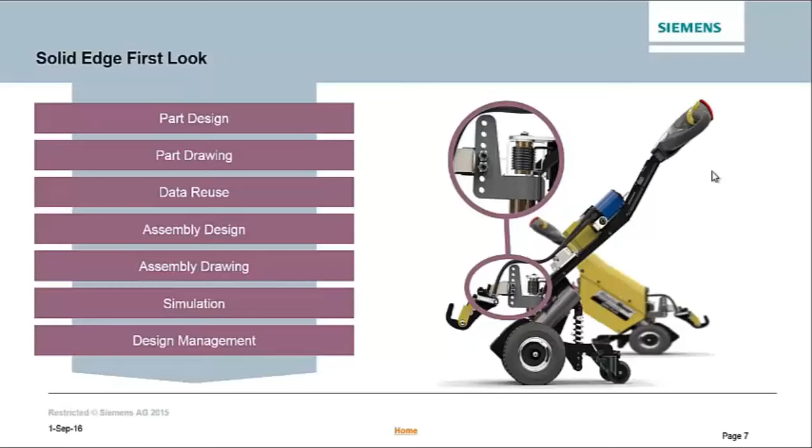We'll also talk a little bit about the built-in simulation tool, where we may need to check for strength and see if a part is going to work properly as intended, and then wrap it up by showing you the built-in design management application within Solid Edge.

Before we get into the part design portion of the presentation, I wanted to give a real quick history lesson on CAD and where Solid Edge is moving in terms of the applications built into Solid Edge and different modeling techniques.

On the left-hand side, you'll see what we call history-based modeling. This is modeling that was essentially created and started in the mid-1980s. It was enhanced and developed and put on a Windows platform in the mid-90s. Many of your CAD systems out there today are utilizing this approach to modeling parts in 3D, Solid Edge included.

Solid Edge has history-based modeling tools. Most 3D CAD users out there today are utilizing this approach. Essentially, when you create models, you're creating 2D sketches, which then create features. Those features are built on top of each other, and when you're finished, all those features make up the entire part.

There's a lot of good things about history-based modeling. It's dimension-driven or parametric, so you can drive the model very easily. It's also feature-based. There are some downsides, though, which we'll talk about in more depth later. A lot of times, utilizing a history-based modeling approach, you have to pre-plan your design and how you're going to model it within the CAD system before you actually get started.

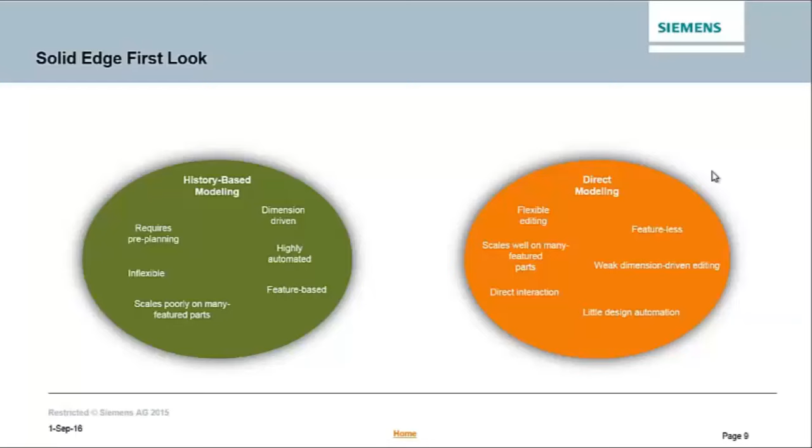It's very flexible. Some of the downsides to a direct modeling approach, though, are that they're really not comprised of a feature-based model, and there's little automation that can be done within these types of modeling procedures. Also, while there is some dimensioning and parametrics involved, they're very, very weak.

A few years ago, Solid Edge decided we wanted to combine the best of both worlds of history-based modeling and direct modeling. So we took the best of both, added some innovative techniques in the middle, and it comprised the tool set found inside Solid Edge called synchronous technology.

So with Solid Edge, you have a lot of flexibility on how you can model parts. You can use both the history-based modeling approach as well as synchronous technology to create these parts very, very easily.

So what we're going to do today is show you, within the demonstration, how we're taking the best of history-based modeling and the best of the direct modeling approach. We'll also incorporate some of the innovative tools Solid Edge developed to create synchronous technology and show you live in the demonstration how this particular CAD paradigm works.

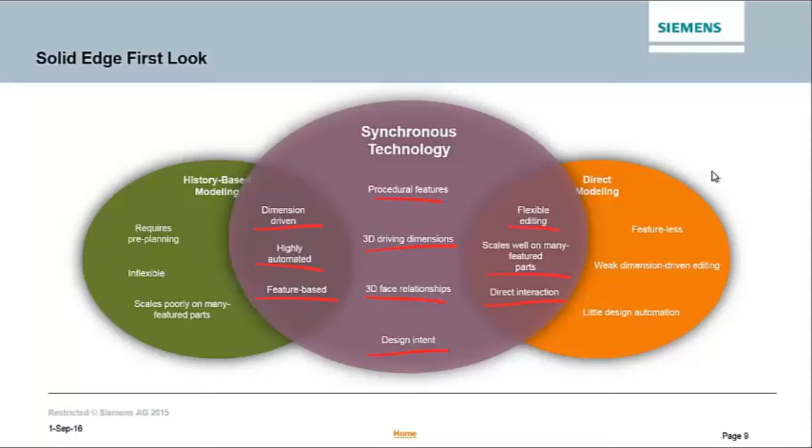I'm going to pull up Solid Edge, and again we can see the master mover tool that we're going to start creating some components with. And you'll see here we've got the entire machine.

We're going to go through a day-in-the-life scenario of an engineer or designer who's been tasked to either make changes to this or maybe create some new components. What I've been tasked to do is construct a brand new part from scratch that's going to connect our clamping mechanism up here in the front to the main body.

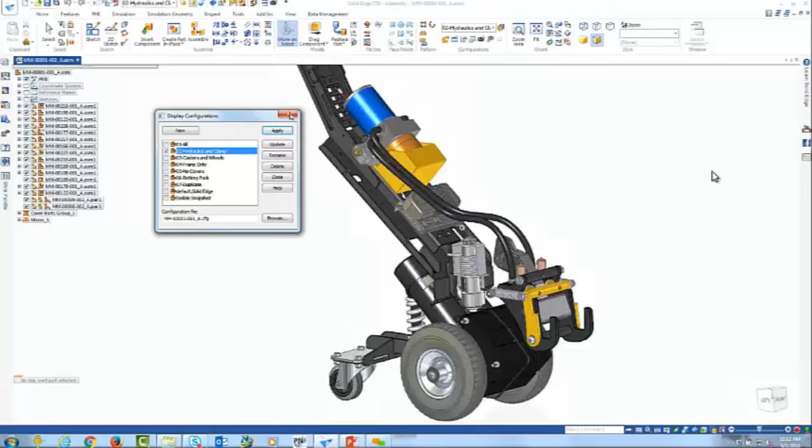What I may want to do initially is turn off some of the outer components, maybe just look at some of those internal components. Solid Edge makes it very easy to show and hide components at will. This is what we call display configuration, and it allows us to create that very easily for what we want to look at.

As I zoom into these components, to give you a little better feel for where we're going, I need to connect the clamp mechanism that's kind of just floating out there in space right now, connected with the hydraulic line to the main body. So in Solid Edge, I'm going to show you this approach.

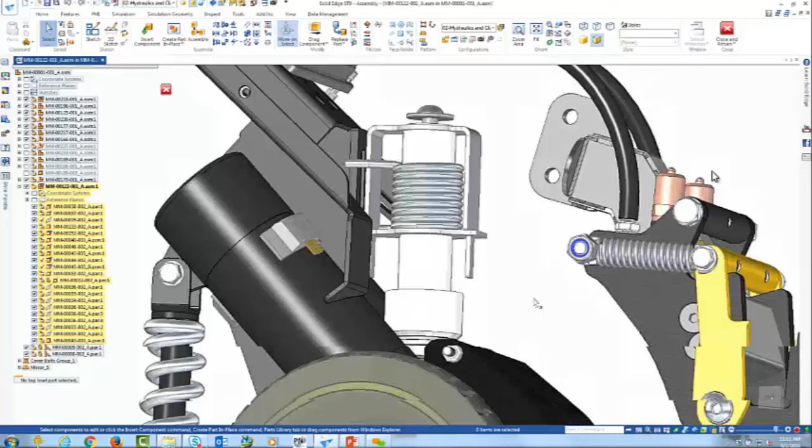In Solid Edge, you have the ability to use what we call a bottom-up design approach or a top-down design approach. Bottom-up meaning I go into a blank design area, model a part by itself, and then bring it into the assembly later. The top-down approach is more flexible since I can model my new part relative to my existing components, so I can check for fit and function as I'm doing the design and make sure I'm not going to detect any interferences, or as I'm completing the design, it's going to fit properly right out of the design process.

What I can also do is reference the geometry of all these existing parts. So what I'm going to do is create a brand new component, and you'll notice I can snap to any location here for where I want the part to begin. You'll also notice I can specify which direction is X, Y, and Z very easily.

Many companies today utilize a smart numbering approach to creating document numbers, and Solid Edge does the same thing. We have a nice smart numbering generator system. So instead of looking up in an Excel document what the next available document number might be for my company, I can automate that process and have it generate the next item for me within the CAD tool, and from there automatically create that within the creation of the new document.

We'll call this, for example, the clamp arm, and give it a nice description. Again, I can specify where I want to save my documents here. We'll talk a little more about the built-in data management tools later, but we'll save it here within our working location.

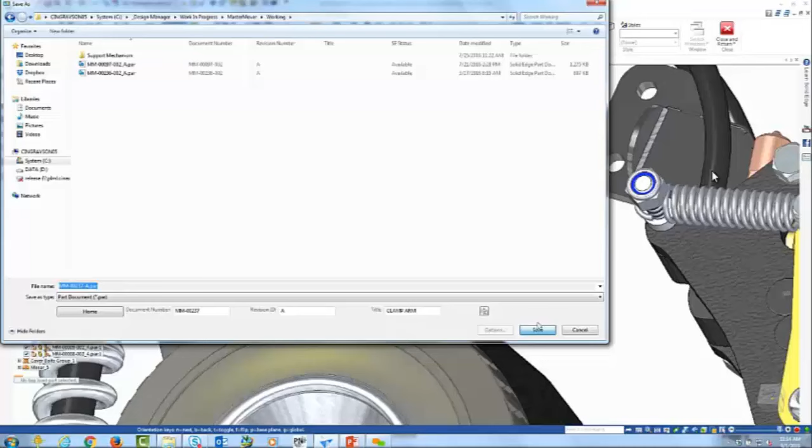The other thing I want to draw your attention to as we're modeling this part is pay attention to how much actual 2D drawing I actually do. You'll see how minimal it is in creating this part.

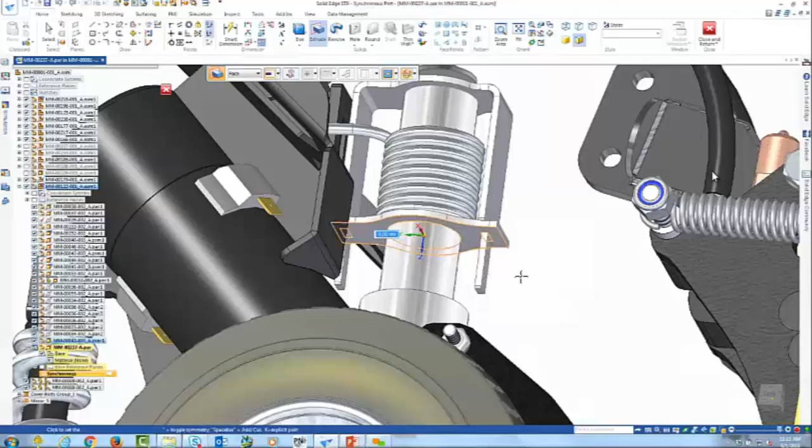The first thing I want to do is borrow some geometry off of some existing components. I know my part's going to reside somewhere in this area, so I can grab the face of an existing part and very quickly stretch it down and mount it to the part that's underneath it. As I turn off my background components, you'll see exactly what it just created for me—very, very quickly, without having to draw any type of 2D geometry, I've created this as the basis of my part.

Now right here in the middle, I've got two little rectangular cutouts. I actually don't want those to be cutouts—I want to create a slot instead. Very quickly, I can just drag my mouse through that zone and eliminate that material, so it creates more of a clamping component versus the little cutouts.

I also have a lot of direct interaction with the part as well. For example, if I want to lengthen this area out a little bit, I can do that just by typing in a value—very quickly stretching the component out again without having to create any 2D geometry.

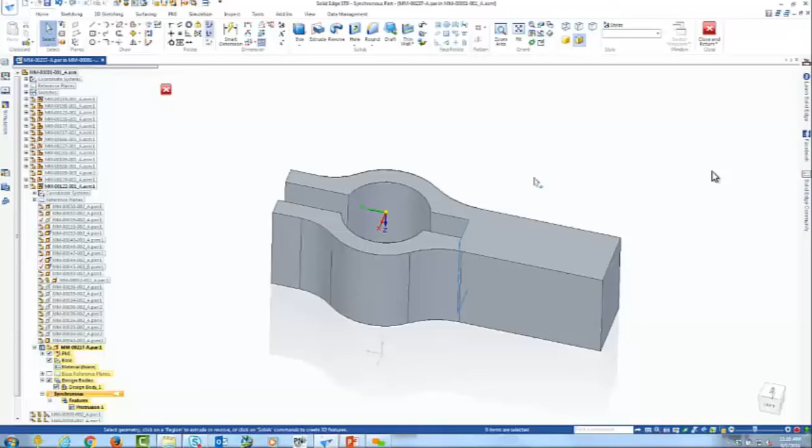As I turn on the background components again, as I mentioned, we need to mount it to our clamping mechanism out here in the front. So I may want to create some additional material, and again I can reference what I have so far and very quickly either cut away or extend material up, or in the area where it's going to clamp into the clamping mechanism.

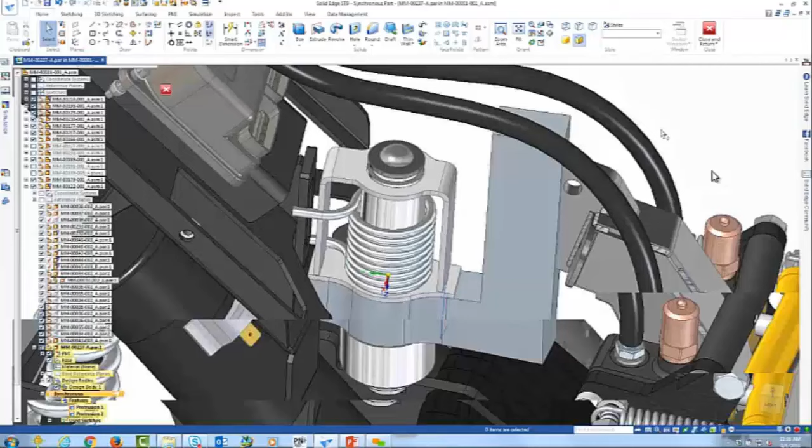Now, as you look at what I have so far, obviously I'm not completely finished with my design. I might need to create a slot or cutout here in the middle of my clamping arm, and some mounting holes so this component can mount to that. I'll go ahead and do that in a few minutes. In the meantime, I just want to focus on some other details of my design.

For example, let's get rid of some of those sharp edges. We can go through and tag these sharp edges quickly and eliminate those, putting some rounds on. Notice I can also pick through the part model to get to edges that are maybe on the back side. We'll round those first, then maybe round the outer edges with a smaller radius, and get this part looking a little more aesthetic.

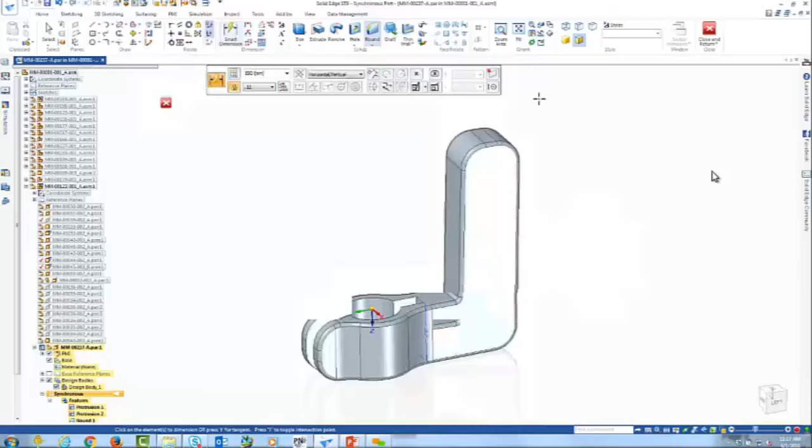The other thing too is I don't have to create, as I mentioned, a bunch of 2D sketches to create features. I can very quickly make my model parametric. Notice that I can directly dimension the model itself.

What's nice about our dimensioning tools is how flexible they are. Notice with placing a dimension on this part, I can choose to extend material out to the right to add material that way, or maybe split the difference and have it grow in both directions, or just have it go toward the inside. So I'm very flexible with how the part is modified. I have control over that as the user.

We'll make that 45 millimeters exactly. So it's not just about pushing and pulling and randomly picking what that's going to be. I can very easily place precise dimensions on the model. We'll add a few more so I can get my part exactly what I want it to be.

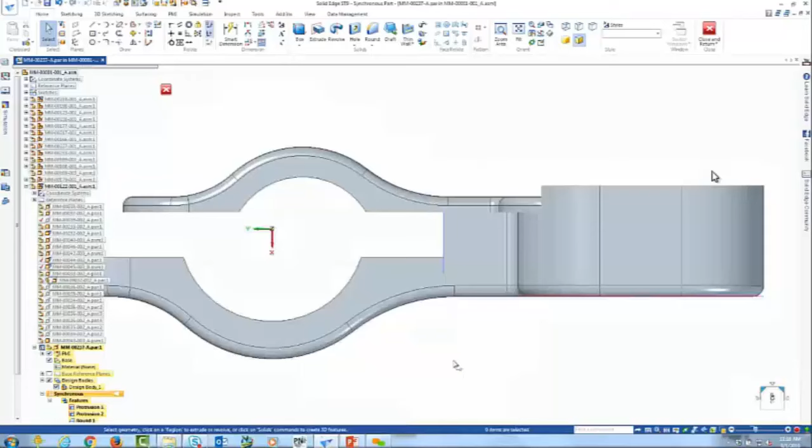So we'll add a few more dimensions. Maybe place a dimension here that extends out, and we'll make that, let's say, 40 millimeters exactly. You'll see the part automatically updates there. Maybe we want to change the length of this slot to some other value. Right now it's at 31.3. Let's make that 34 even.

Let's dimension the bore here. We'll call this out as a diameter versus a radius, and change that value. Actually, while I'm at it, let's put a tolerance on that. We can easily go from nominal dimensions and instead put a tolerance value on, maybe plus or minus some values.

Then maybe we'll add one more dimension over here for that slot cutout we created earlier, and make that some value, let's say 9 millimeters. So you can see how easy it is to throw dimensions right on the model and make adjustments as necessary.

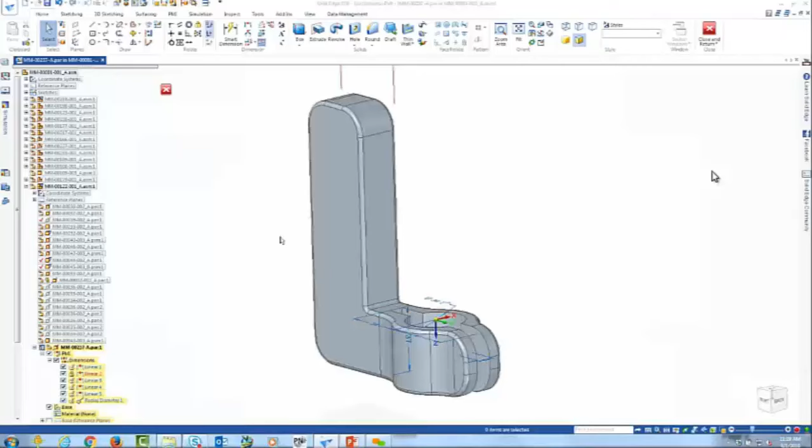Maybe the last dimension I'll place is an overall height. Let's see how tall this is. Yeah, that's 150, which is what we're looking for.

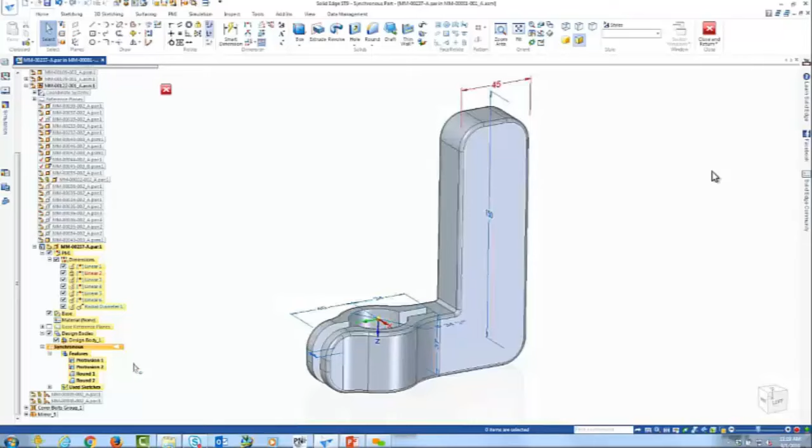Being able to parametrically create and modify the part at will, without having to create 2D sketches, is what separates synchronous technology from the history-based modeling approach, where typically you're spending more time drawing than working on your actual design. I'm going to turn off these dimensions for a second.

Again, let's turn on those background components and take a look at what we have so far. I'm almost done with the design—I just need to quickly put that slotted cutout and those mounting holes in my part.

Let's get some information from other components. Let's see how wide this is—it tells me it's just shy of 8 millimeters in width. So when I create a slot, I know exactly what the width needs to be. We have a specific slot feature we can create. Let's just specify where we want that to be.

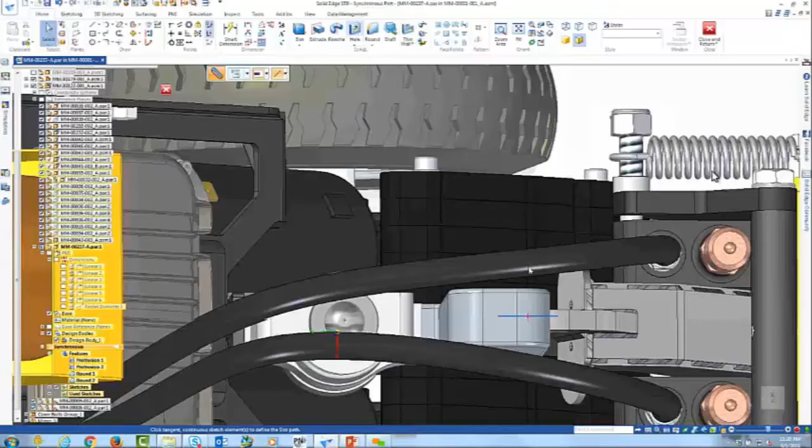Again, this is only the second piece of 2D geometry I've created, and it's just a simple line. From there, I can go through my slot feature and blast a slot right through the part. And from that simple line, it creates a nice slot for me.

We mentioned earlier too about the benefits of CAD being feature-based, and you can see over here on the left-hand side all the different features that comprise my component. So I have protrusions and rounds, and that slot feature I just created.

Just like you might be used to if utilizing a history-based application, you can come in at any point and modify those features. Maybe instead of a flat edge to my slot, I want a nice rounded edge instead. I can go into that feature and make modifications very easily. Or if I wanted to change the width, feature-based modeling allows you to make those changes easily. We'll make that back to a flat end.

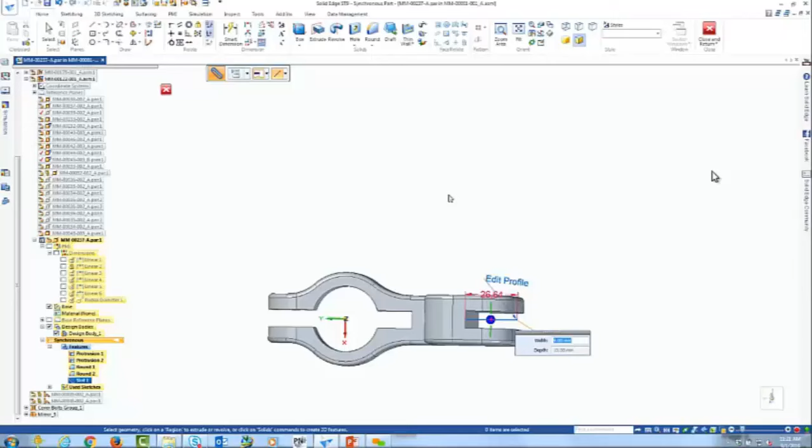Let's turn on my background components and make sure my part's fitting in there nice and neat—and it is, we've got enough clearance. Really, the last thing I need to do is place some mounting holes in there, and we can do that very easily as well.

Our hole feature allows us to create any type of hole, whether it's a simple through hole, counterbore hole, or countersink. You can go through and change any of this to what you want it to be for any types of standards that your company might use.

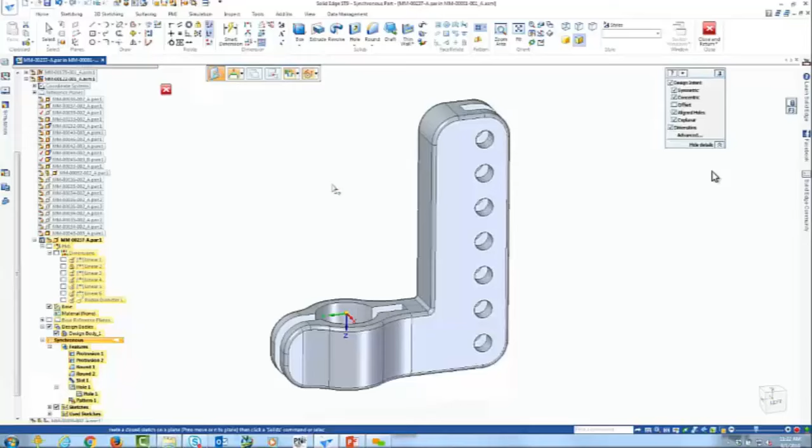In this case, I'll place a hole here at the end of that radius, and for flexibility in mounting this, we'll place several of these. Maybe we'll make a 7x1 pattern and equally space these by 20 millimeters, so that as we mount the clamping mechanism, they can choose which mounting holes they want to use.

Now, what is this part made out of? Sometimes you may want other information, like how much does this part weigh. We have a built-in material table, and you can customize the materials your company utilizes. In this case, I'll make this out of aluminum cast—it has all the different material characteristics here, and I can just apply that to the model very easily.

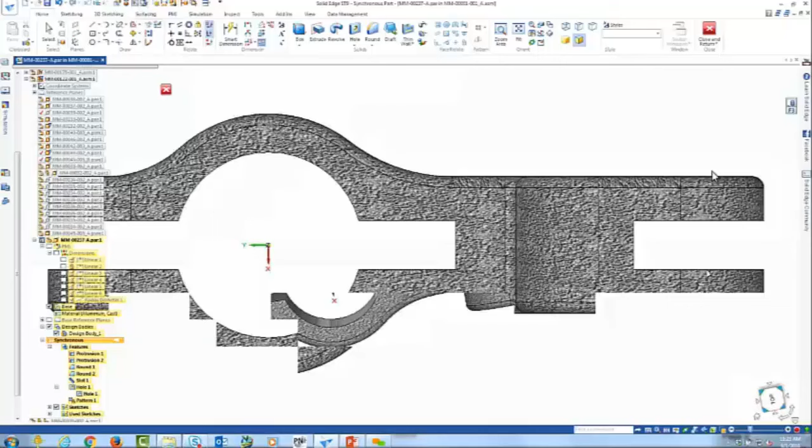The other thing is I want to make this look a little more realistic. I may want to show where these machining operations happen, so I may want to change the look of some of these faces. We'll change the colors of the slots, and maybe do the same thing with the holes, to make this look a little more realistic.

We'll go ahead and save what we've done so far.

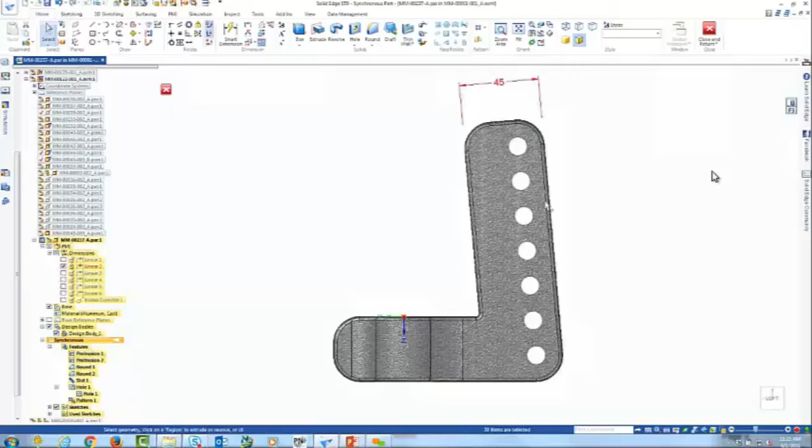Just one more drastic change—maybe as I'm thinking about my design, I realize that to add a little more tension as it's mounted to the clamping arm, I may want to take this entire vertical leg of my clamping arm and put a little bit of angle to it. So I can take that entire leg and rotate it 5 degrees, so that when the clamping mechanism is attached, it adds a bit more tension to make the traction a little better for moving those heavy loads.

So if we go back to the PowerPoint presentation, we saw that we were able to use the best of both worlds—history-based modeling as well as the direct modeling approach. Essentially, we use synchronous technology to very rapidly create a model with very minimal 2D drawing capabilities. I was able to create that entire part by only drawing 2 single lines.

The other thing we haven't talked too much about is the engine, or kernel, which runs Solid Edge—it's based off of a Parasolid kernel, which Siemens owns, so it's the best in the industry. Many of our competitors utilize the Parasolid kernel on top of their CAD applications as well.

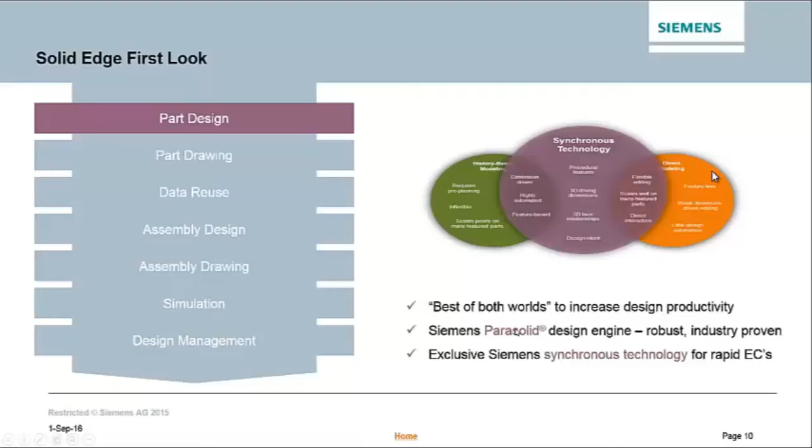So the next thing we want to do is create a drawing of our model. We want to communicate that to the manufacturing floor—how is this part going to be created, how do we essentially make this part. So we want to document that within a 2D drawing.

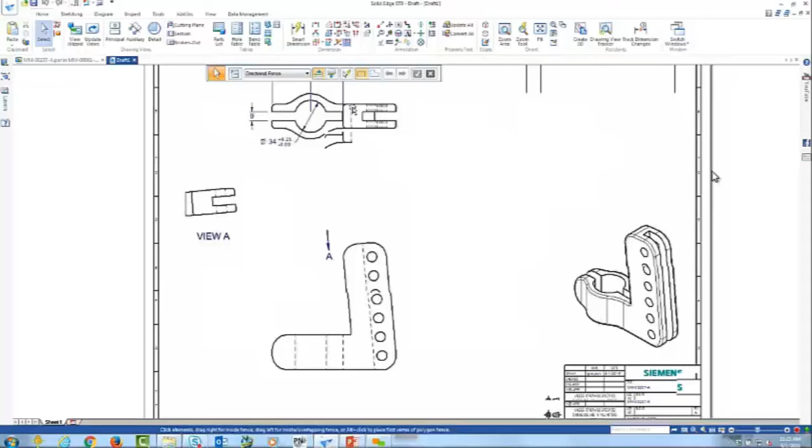Right here from the model, I can very quickly tell Solid Edge to create a drawing of my model. Just come up here and say, let's create a drawing. What it's going to do is place this drawing onto a template—this is what we call a quick sheet template, which allows us to extract views and specific information from different views. In this top view, I told it to extract any of the dimensions that I placed, and if I want to add or replace any new dimensions, I have the same ability to do that here.

Utilizing the same dimensioning tools that we utilize in the 3D modeling environment, we utilize the exact same tools here in the 2D drawing. So users don't have to learn two different applications. They can utilize the same tools both in 3D as they do in 2D. I'm just going to place a few dimensions on this view to show how that's done.

We can also do the same thing in documenting the hole locations. Again, it's very easy to do that.

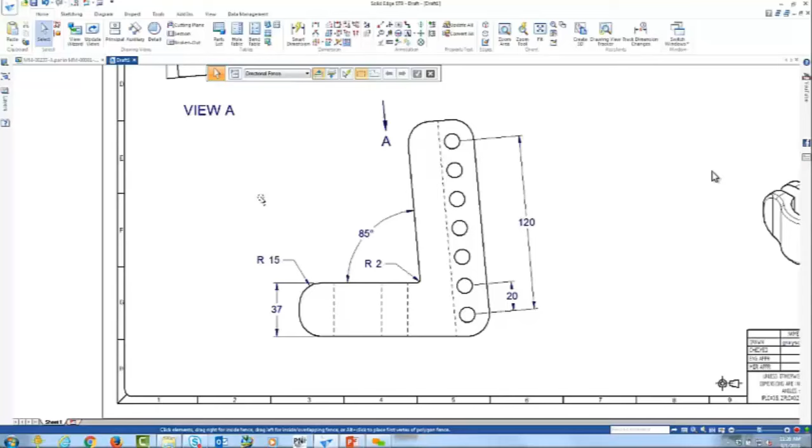Other types of details that you might need to add to the drawing, say for example, placing center lines and center marks, it's very easy to do that. Simply click on the geometry. Or if I want to do multiple center marks at the same time, I can window select and create all those simultaneously. Same thing with center line - just place the elements there by clicking on the hidden line. We'll do that for the hole locations up here as well.

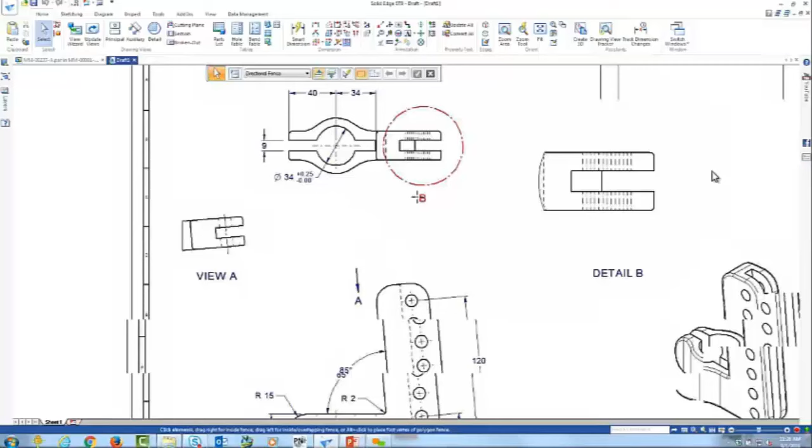Creating other views is also very easy. If I wanted to create a detail view, I simply just create a circle. It'll automatically blow that up and create detail B. And then what's nice about that is as I move that detail circle around, it'll automatically update this so I can get this exactly where I want it and document exactly how much detail I want.

The other thing about detail views which is nice is in this case, it's a 2-to-1 scale, but even when I place dimensions on this, it's going to place the dimensions per their true value. So it doesn't scale the dimensions up - it's always documenting what this is from the model itself.

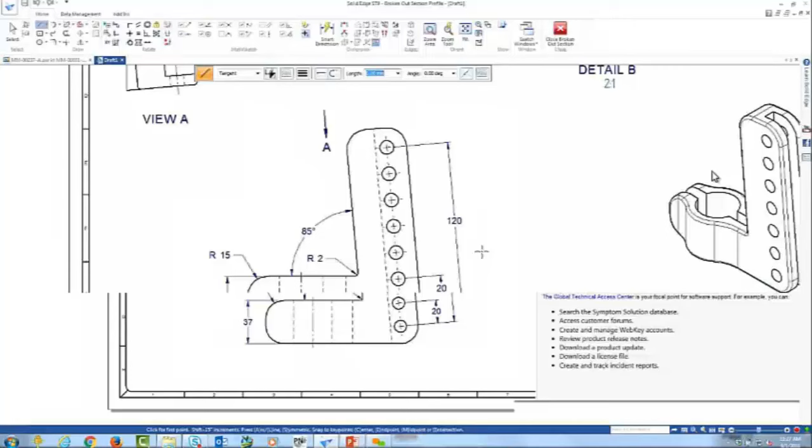Maybe one more thing we'll do here is maybe I want to see some of the internals of this part, here in this isometric view. We have a nice little tool here called Broken Out Section. That gives me the ability to come in and very easily create any type of shape that I want. Maybe I just want to create a broken out section down here. And how deep do I want that to go? Maybe I want it to go here to the middle of this, and I want to show that in this isometric view. So very easily I can create a lot of detail that I might want to see in my drawing.

So again, in creating a drawing of your models, we're able to very quickly add views and clearly communicate our design. We can retrieve the dimensions right onto the drawing from the 3D model. It's very automated and allows you to adhere to national or even your corporate standards.

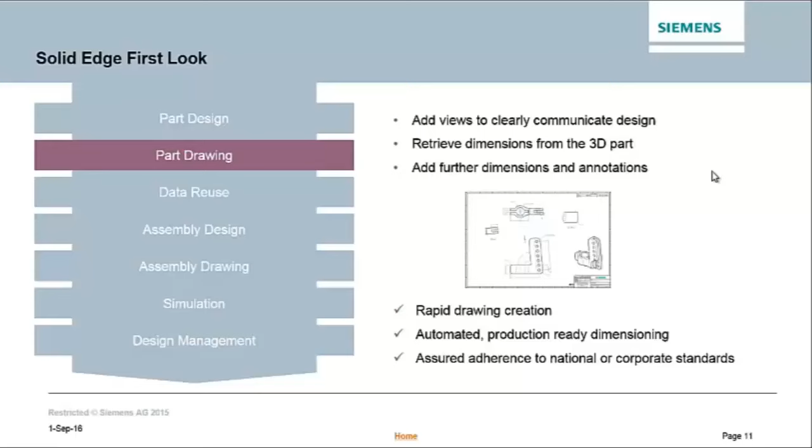The next thing I want to talk about is reusing data. And this data, as I mentioned earlier, could be 2D data. It could also be 3D data. Maybe your company previously had a 2D CAD system like AutoCAD, and you have a lot of legacy data. Maybe you want to reuse some of that data for newer designs.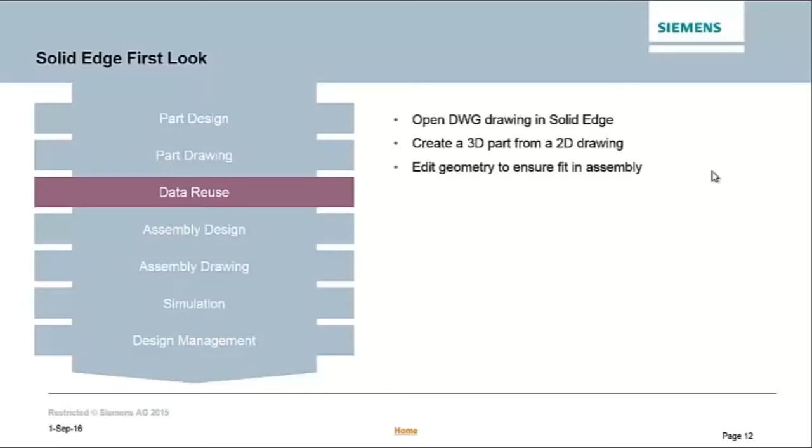Or maybe your company has a different 3D CAD system that you're having issues with, and you're looking at switching to Solid Edge. Solid Edge has the capability to read in that data as well as reuse it, make changes to it, and really do whatever you need to do.

When I go to the File Open menu for Solid Edge, you'll see down here in our list all of the different file types that Solid Edge can read in directly. Towards the top of the list are the native Solid Edge files. As you look down the list, you'll notice we can also open up many other CAD tools directly, both 2D and 3D. So we have AutoCAD, DWG, and DXF.

Much of that information is filled out there in that format. And then as well, if you get files from customers in a different format, or maybe you work with supplier or vendor data that's of a different format, or maybe you go to their website to download it - regardless of the format that you need to utilize, Solid Edge is able to open it up directly and do many things with it. In this example, I'm going to go to AutoCAD, and again, just show you here, you can preview the document before you actually open it up. But there's a nice little wizard here - we bring in the layer structure from AutoCAD directly.

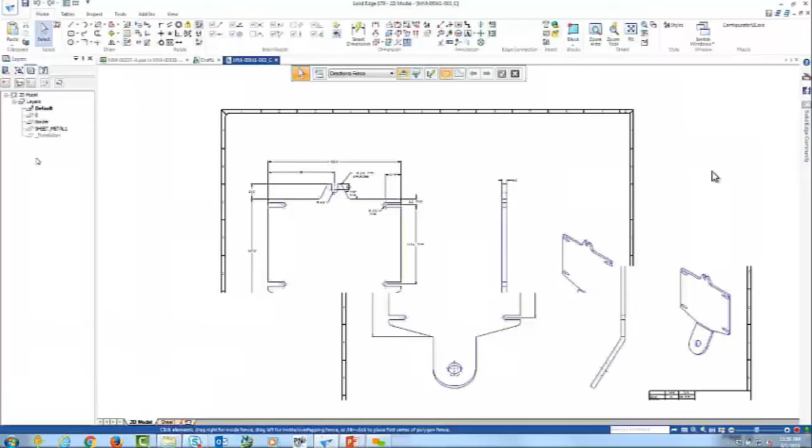And then we can also do the same thing from a 3D perspective with those other tools. In this example, I'm just going to open up the AutoCAD file, and again show you how it opens up all the geometry and dimensions. It also brings that layer structure across.

If I wanted to add some dimensions or add some geometry to this, I have all my drawing tools here - what are my colors and what are my line widths. I can create additional 2D geometry relative to this.

If I want to go through and place dimensions, I have all my dimensioning standards here, whether it's ANSI or ISO. If I want to place dimensions on that geometry and drive that geometry parametrically, I can do that here in 2D, just like I did in the 3D environment. So it gives you the ability to very easily drive geometry and make it parametric just like you did in the 3D world.

The other thing too is I can actually utilize the existing elements off this drawing to create a 3D model very quickly. We have a tool here called Create 3D. Essentially it allows us to take the 2D information off of a drawing and create a 3D model very easily.

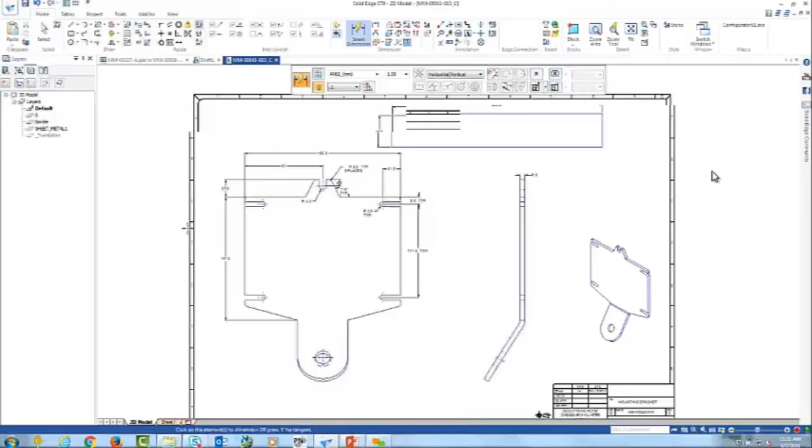So for example, I'll take the front view as well as the side view. This is just a sheet metal bracket that I want to reuse. And I actually clicked a little bit too quick there - let me go back to that for a second.

So again, you'll notice that I'm picking not only the 2D geometry, but I'm also picking the dimensional information off of these views. So what it does is when I click on that information, it takes that information into a modeling environment for me, and you'll notice it lines up the side view relative to the front view. Again, it takes all that dimensional information, and very quickly I can come through and start creating a 3D model from this.

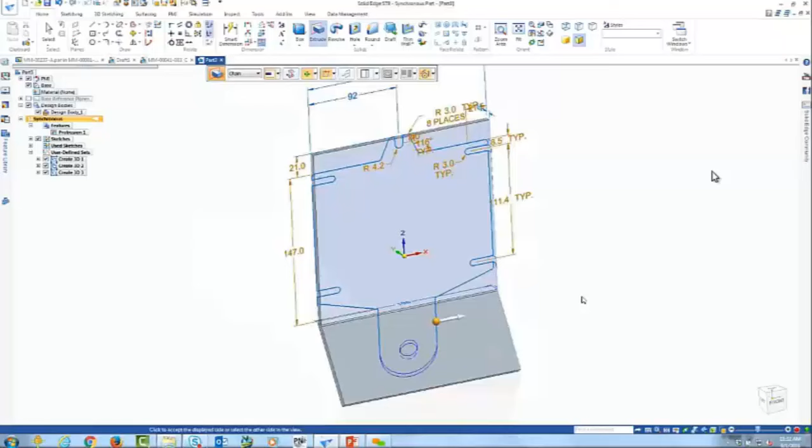We'll grab some of the elements off of the front view, extrude that out to the front, and round some of these front edges here. And for that mounting hole there, let's just quickly add a hole. And just in a matter of seconds, we've constructed a 3D model from that 2D drawing - that was probably less than a minute there.

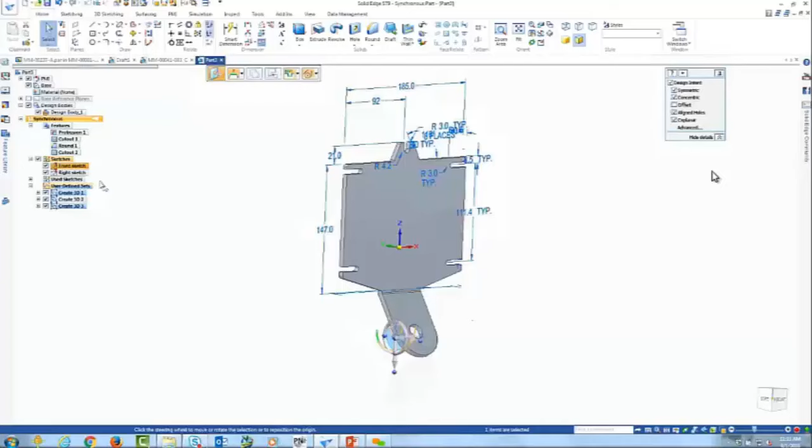Now, again, if you're used to using a history-based system where you're creating sketches, and from that sketch you're creating a 3D model, you know that those two things are tied together - if you change anything on the sketch, it automatically updates the 3D model. But what I want to show you here is I'm actually going to take the 2D sketches that I brought in from AutoCAD and just delete them out of the file. Don't need them anymore, because once I have the 3D model, everything is now driven directly on the 3D model.

So for example, all of the manufacturing information that was on the original AutoCAD file, I can now utilize and drive the model parametrically. So maybe I want to change this height of this little clamp here - notice I can click on the dimension directly now and modify that. Or maybe I want to change the angle from some other value. So very quickly, not only can you create a 3D model, but it's also highly editable.

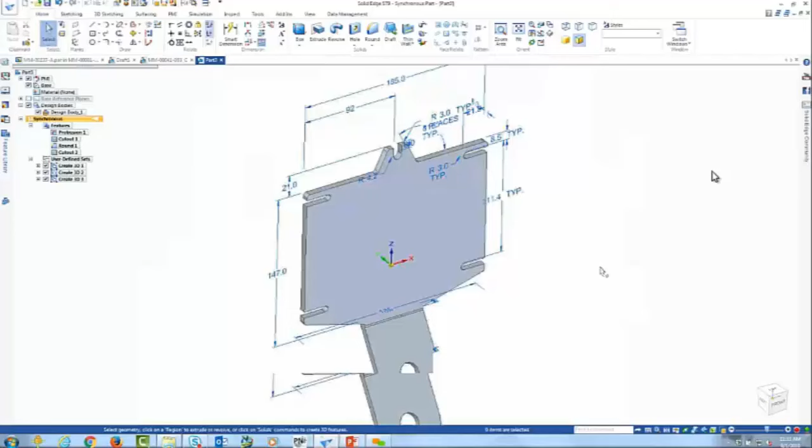The other thing I want to draw your attention to is when I constructed the model, I was utilizing what we call a part template. Part templates are typically more for plastic or machining or machine type components, but this is actually a sheet metal part. And what's nice about Solid Edge is I can take any type of component like this and convert it into a sheet metal part very, very quickly.

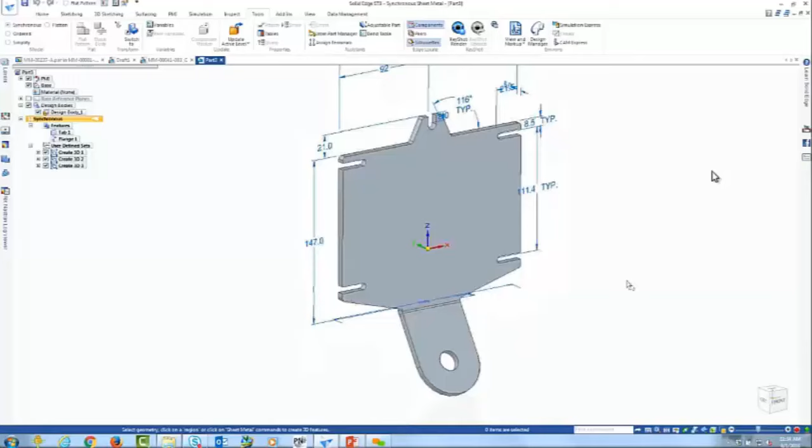So we have a nice tool here called Thin Part to Sheet Metal. Just simply click on the part, and now it can act as though a sheet metal part would act, so I can create flat patterns and things of that nature for manufacturing purposes. If I want to change bend radius or bend angles, things of that nature, now I can click on that bend and say, well, let's go from 3 millimeters to 6 millimeters.

I can also come in and say let's create a flat pattern for manufacturing purposes, and it'll flatten that out for me. It gives me what my sheet size needs to be in order to manufacture this part. So again, just a matter of a minute or two, going from a static 2D drawing to a very dynamic 3D part model that I can now reuse.

Let's save this. We'll go back and reuse the part numbering system, and we'll just call this bracket.

And we can go ahead and close this file. We'll bring this bracket into the assembly that we were working with earlier. So let's go back into that assembly. We'll close out of this particular part now that we're done with it, and come back to the assembly that it's in. We're going to place that sheet metal part here and connect it to some of our other components.

Bringing parts in is very easy to do. So for example, here's that sheet metal part we just created. Go ahead and just simply assemble it where it needs to go. Again, we're just clicking on geometry, moving that around, and we'll line this up relative to these other components.

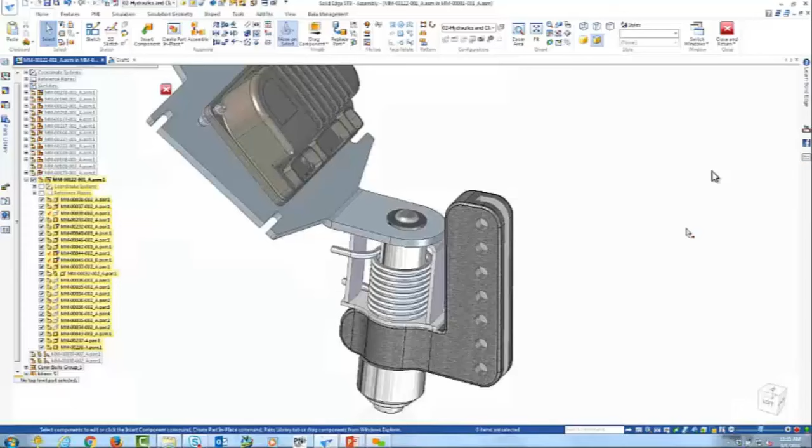Now, sometimes when you're reusing data, maybe you didn't check carefully, or in my case, I didn't check very carefully. We were able to use this as kind of a starting point, but as you'll notice, this part doesn't quite fit like we want it to. It's close to what we want it to be, but not quite exactly. So I need to make some changes to this. Obviously we have a difference in angle here. How do I fix that with Solid Edge?

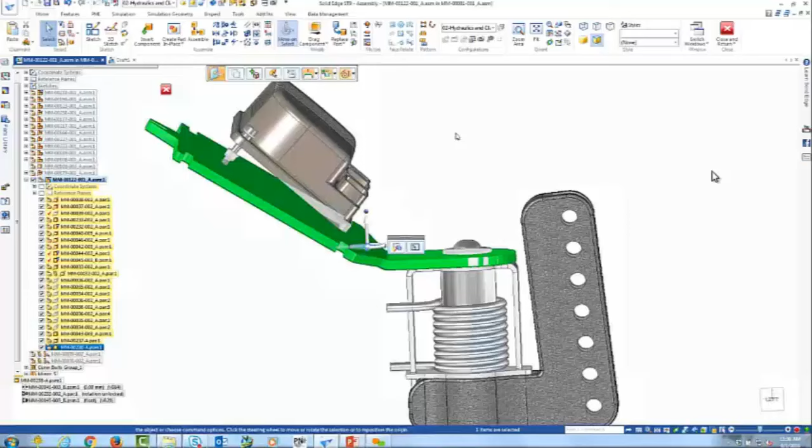Well, let's first find out what that difference is. And it tells us that the difference is a 10-degree angle difference in mounting it to the location where it needs to be. So what I want to show you is I'm going to isolate this part by itself for a second. In Solid Edge, what's nice is I can take that angle, show the rest of the components, and just change the angle. So I can drag that up, I can change it—don't want to bend it quite that far—but again, just type in that value, in this case 10 degrees, and get that mated up to the component exactly where it needs to be.

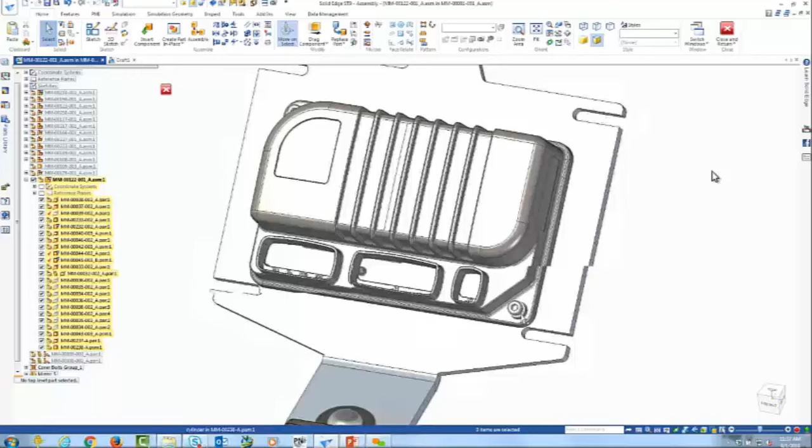Some other differences here in reusing this data is my slots where my molded components need to be are not quite where they need to be. Again, with Solid Edge synchronous technology, changing the location of these cutouts is very, very easy to do. I can just simply tag it to the center point of that bolt and move that slot location where it needs to be. Anything up here, maybe I want to make this entire section of this part a little bit shorter, so I can just window select around all that geometry, and again, just very quickly make this change. We'll drag this down to where it needs to be also.

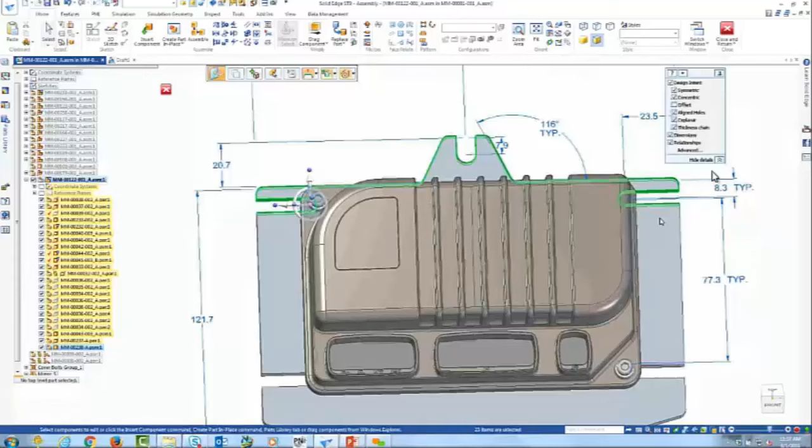So very quickly, I've created the 3D model from the 2D drawing. I've repurposed the geometry for what I need it to be, and I've done that all within a matter of a couple minutes. So again, we went from legacy 2D data, converted it to facilitate reuse. We did that and made changes very easily to it, saving us a lot of time and a lot of effort.

And again, if I wanted to do this with other 3D data that may have come from other 3D CAD systems, I can do exactly the same thing that you saw there. Let's do a little bit of assembly work. Let's put some pieces together. We'll talk about standard components, nuts and bolts, things of that nature, and what comes with Solid Edge there as well.

So let's come back out to our top level assembly, and let's show some other components here that we want to work with. Let's go back to that clamping mechanism that we looked at earlier and actually get that assembled where we want it to go. Again, I very easily just select geometry and move those parts where they need to go. Very easy to do that. Get that into position.

And then obviously to lock this in place, we probably want to put maybe some screws or some nuts in there and just kind of keep that in place. Solid Edge has a nice tool called standard fasteners, which allows me to create these very, very easily. And I don't want to put fasteners in all of the holes, just in the ones that are going to mount this onto the clamp arm that we created.

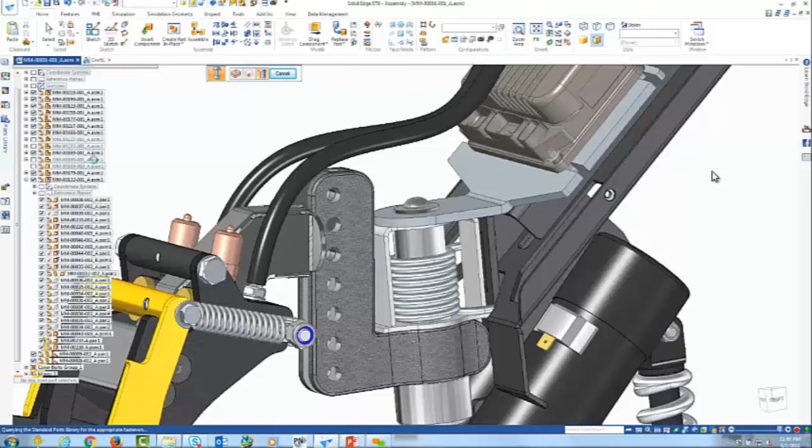So I'm just going to select the top hole and the third hole here. By selecting the depth of the hole, Solid Edge is going to intelligently go out to our machinery library and pick the components that would fit into that hole. As it works its way through the library, it's filtering out which components are going to be available to place inside of that hole.

So over here on the left, I can select, do I want to put a bolt or a screw? Maybe in this case, I want to find a hexagon socket head cap screw. So I'll go to that, pick my standard, and then it'll tell me which ones are available. Maybe I want to put an M10, so I'll just add that to the list. That's in my bolted components.

And then maybe for other components, I just come out and select specifically what I want. Maybe we'll put in a prevailing torque type nut, and it gives us a nice preview there. We'll add that to our list. As soon as I click OK, it'll populate those two holes. Now this is a feature, so if I decided later on I wanted to change which holes those were located in, I can come back at any step in that process and change that.

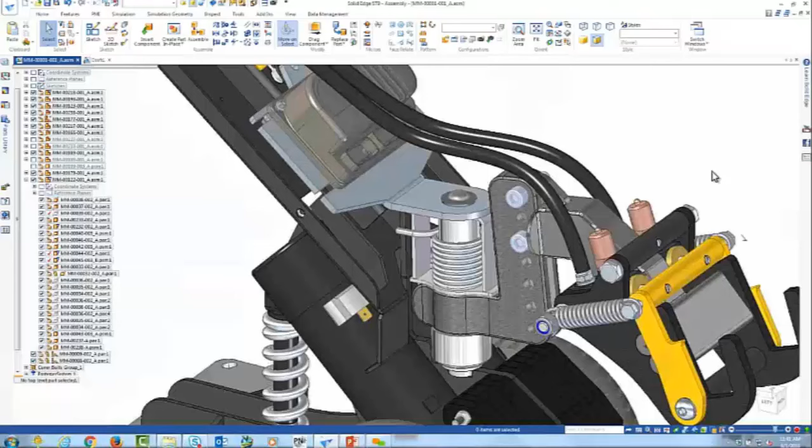It's very, very easy to do, very flexible. The other thing too is I might want to make the look of my components look a little bit more like the other hardware. So we have a nice design palette here, allowing us to pick from a different list of material finishes. I'm just going to take the chrome finish and place it out here on the bolt.

And change the look there. We'll do the same thing from the style palette. We'll place that onto the two nuts. Change that very, very easily. It's simply just a drag and drop.

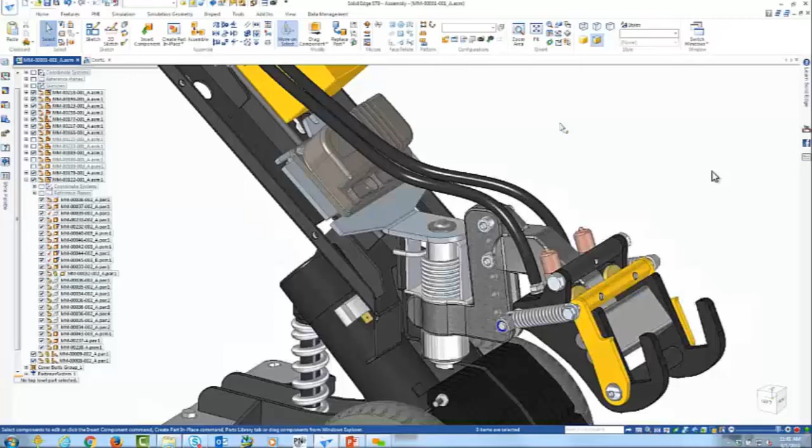If your company wants to create more photorealistic renderings and make the parts look as though it was taken with a photograph, make it look very, very realistic, Solid Edge also has a tool called KeyShot, and it does photorealistic rendering on your designs as well.

The other thing we'll talk about in terms of assembly is let's come in and add some additional components. Let's go into kind of where the caster wheel is here on the back. I want to show you here, we only have the one caster wheel in, and we want to place an identical set on the other side. Obviously we can go to our libraries and drag those in, but what I want to do is show you how easy it is to copy from one location to another.

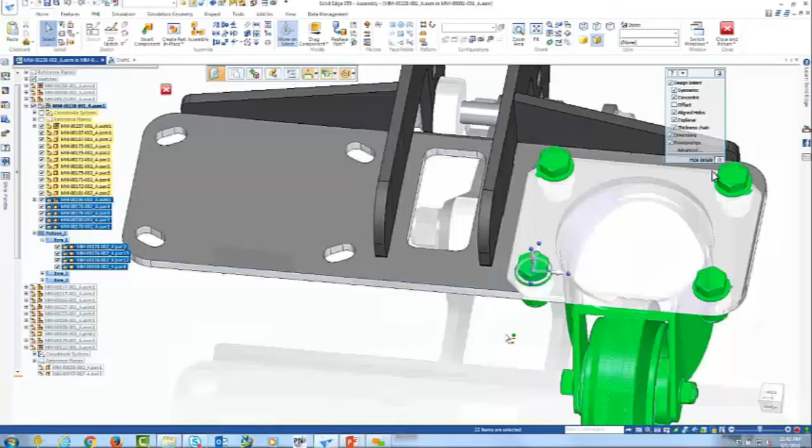So again, I'm just going to window select around the existing caster. Place that relative to the center point there. Just like if you were in Word or PowerPoint, if you hold down the Control key, it'll copy text. I can do the same thing here with components. We just want to copy that to that new location.

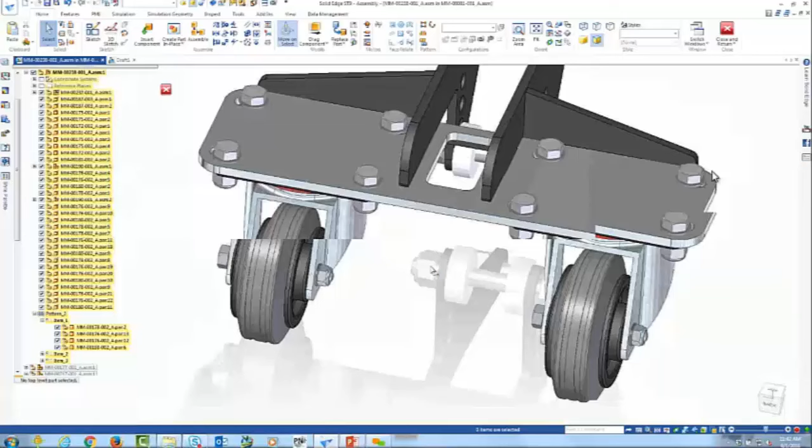Very quickly, I've replicated those parts. Not only did it copy those parts, but it also assembled them at the same time, so mating conditions, things of that nature. If I needed to align holes, it automatically placed in those assembly relationships as I copy them over. Very, very intelligent tools in terms of assembly design.

Let's go ahead and save what we've done up to this point. I've got a couple more things we need to do to complete our design. But as you saw here in the assembly design process, a lot of these tools are automated. We needed to go through and check fit and function, and rapid component duplication is going to increase your productivity. Let's go ahead and document our assembly as well.

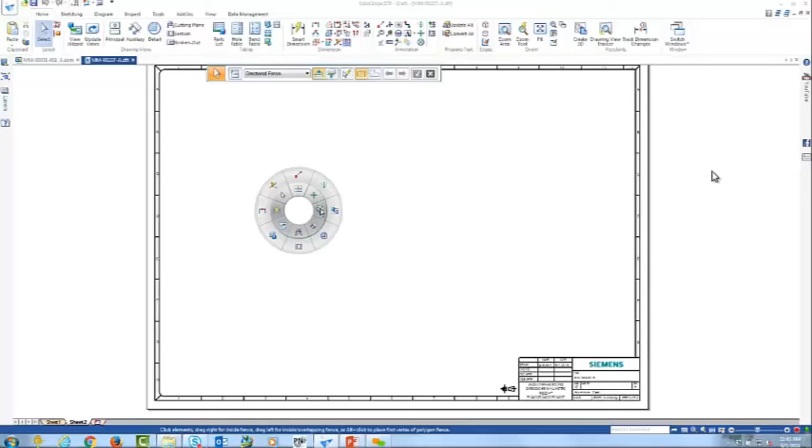We'll come back to the drawing that we created earlier. Actually, let me go ahead and save that initially, saving this folder for the first sheet. If I want to add multiple sheets to my drawing, I can do that very easily as well. Let's go through and document the assembly that we just worked with. We'll come out here to our drawing view wizard. Again, maybe if I don't remember exactly where those components are located, Solid Edge also has a nice search tool.

If I want to search based off of keywords or specific files, I have a nice search tool here. I'll just search the keyword 'hook,' maybe from the clamping mechanism. As I search for that, Solid Edge very quickly goes through and finds where that file resides.

And allows me to place the different views of that clamping mechanism on my drawing. In my case, I'll want to do a nice exploded view. Instead of the typical black and white view, I want to render it so we can see the components a little easier. Very easily I can take assembled components, explode them, and place that view onto my drawing.

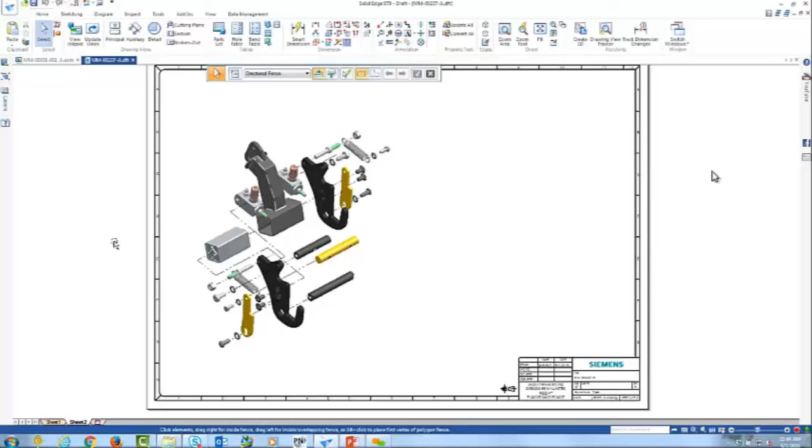If I want to document this inside of a bill of materials or parts list, I simply click on the view, choose from any company standard, and it not only balloons all of those components but also generates a nice parts list.

In the parts list, it works very much like Excel. So if I want to spell out or make modifications, maybe to a title, I just click in there. The other thing that's nice is if I want to see which components I'm referring to from the list, I can put my cursor there and it gives me a nice thumbnail of which part it's referring to.

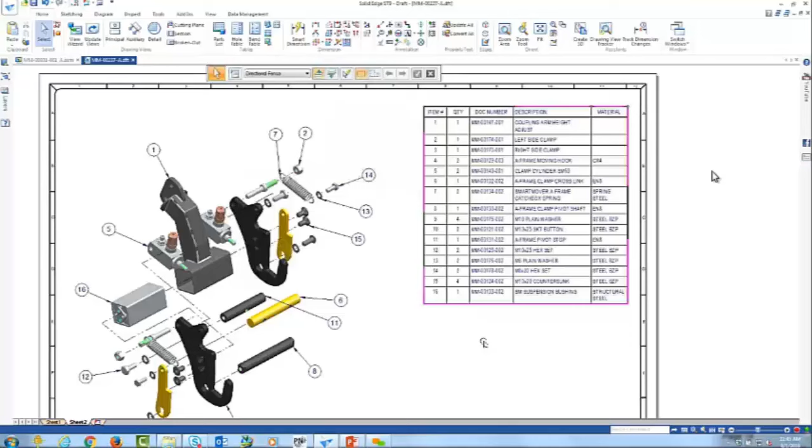If I click on a cell, it'll highlight where that part is inside of the drawing view. So very easily I know exactly what parts my list is referring to relative to the drawing view. Again, very easy to document your assemblies, just like what we saw with the part components.

Let's talk a little bit about testing our components. We come back out to the assembly. I may need to test this part and make sure it's going to work under the conditions we're in, so let's go back to that sub-assembly and open it up. Again, Solid Edge has built-in simulation tools, both for single part as well as assembly.

I simply say I want to create a new study. Solid Edge has linear static studies, normal modes, linear buckling, and some steady state heat transfer options as well. In this case, we'll do a linear static study.

Very easily, I'll apply the loads that we need to our component. In this case, we'll place a force as this part is pulling a heavy load, maybe some force on those bolt locations. Then which direction is that force going to be, and how large is that force? In this case, maybe 250 newtons.

And then we will fix it relative to this cylinder here. Once I've done that, it gives me the ability to solve this, to see exactly what's going to happen under those conditions.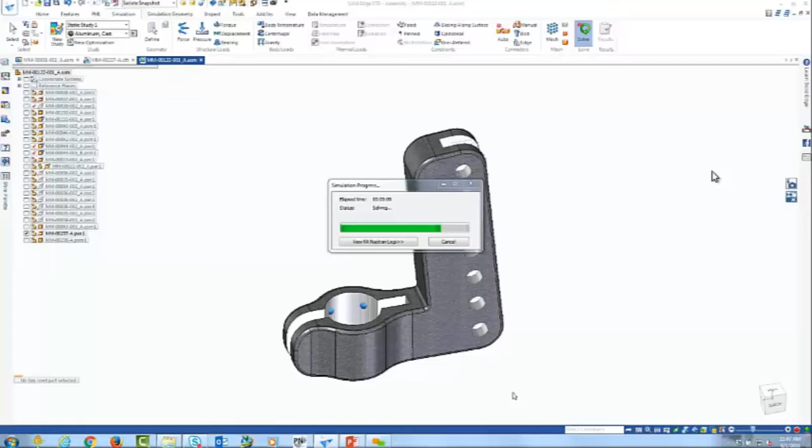So as we look here, I can turn on the remaining components. I can animate — obviously the animation is a little exaggerated just so you can see what's happening. But as we apply the loads, we can see where we may have high stresses, and if we're looking for factor of safety as an example, we could look at that.

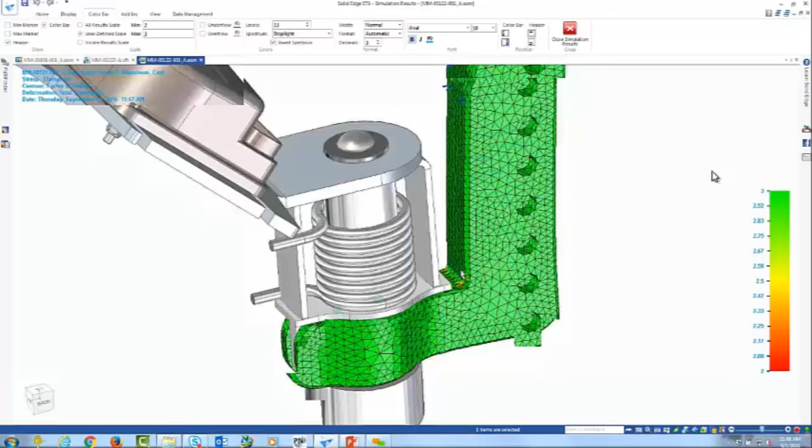Let's look at factor of safety in this case. Maybe we want a factor of safety between 2 and 3, so let's display that. 3 is good in our case, 2 is not so good — we want it closer to 3. If we look at the display of our model, you can see we've got a bit of an issue here where the radius is. We might want to make some design changes to accommodate for that.

So I may need to make some changes to this. Let's go through and make some modifications — maybe we want to thicken up the clamp arm. If we do that, we may also need to make a change to this sheet metal bracket. But in Solid Edge, I can do that all in one shot, making changes to several components at the same time. I just click on the geometry I want to modify, grab the face of that sheet metal bracket, and start to make this change.

Now, the dialog box that you see here is part of our built-in data management. As I try to make a change to that sheet metal part, Solid Edge automatically tells me that this part has been released. You can't make a change to this part because it's been flagged as released and it's read-only now.

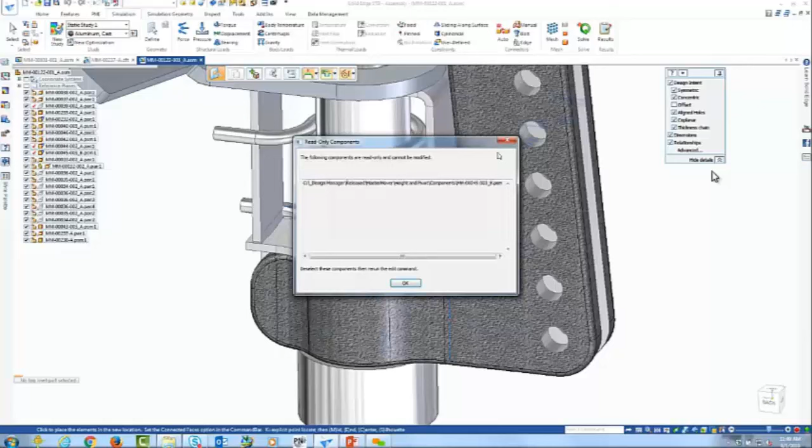So as the designer, I know that I need to either create a copy of that part and make a change, or maybe I need to revise that part. If we look on the left-hand side for that sheet metal part, it's telling me that I'm utilizing revision B, and you see it also has a red check mark.

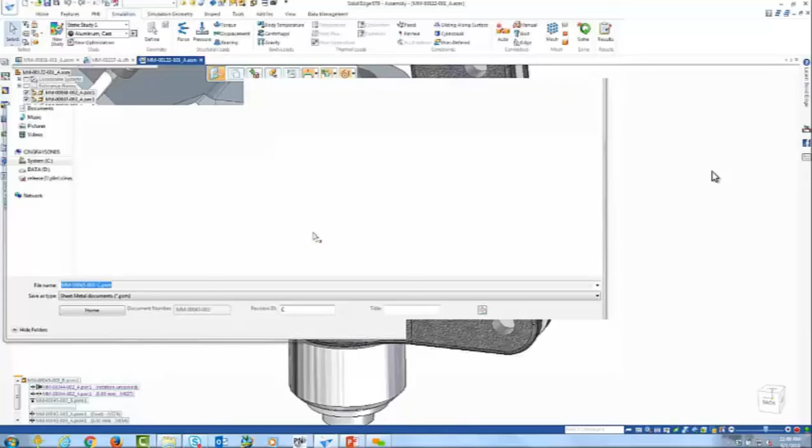That's a visual indicator that this part has been released, which I didn't see initially. What's nice about this is in Solid Edge, all I simply have to do is tag that part, come here and say I want to revise this part. Solid Edge will automatically create revision C for me. As soon as I save that, it automatically replaces revision B with revision C, and now I can make the appropriate changes that I need to make.

So let's go back and do what we were trying to do earlier. Let's make changes both to our clamping arm as well as the sheet metal bracket. We'll do this all at the same time, and we'll extend that face up, change that, let's say maybe 5 more millimeters.

And we also had some issues in the corner, so let's go through and make a change quickly to the radius here. I don't want to change all the radiuses, I just want to change that single radius there in the center. And maybe we'll change that to, let's say, 5 millimeters, make that a little bit bigger.

Once I've made those changes, without doing anything else, I can now resolve the analysis and get the feedback that we need to see based off of the design changes that we made. And again, just a matter of seconds, we can see that our stresses have decreased. And if we want to look at, for example, factor of safety, we can do that as well, see exactly where we are in that range of 2 to 3.

And now you can see we don't have any more red or low points of factor of safety here. Those design changes did exactly what we needed them to do.

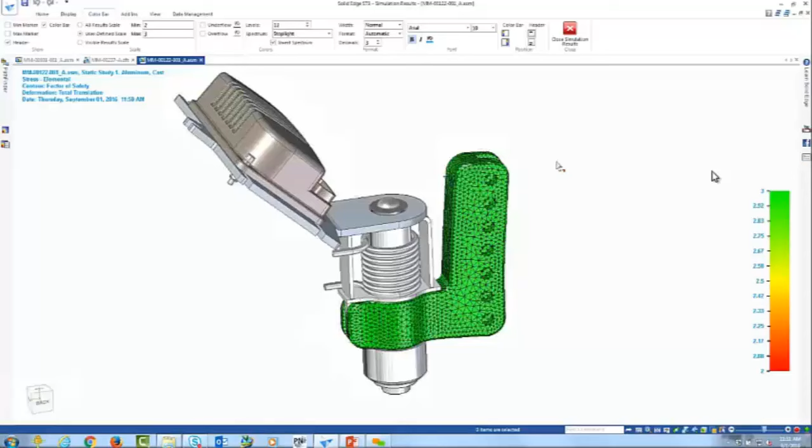I know we're getting short on time here. I don't want to go into a ton of detail in simulation, but we also have automatic report generation, where you can create a report very quickly right here from the simulation environment and get all the information to pass along to whoever you need to send the results to.

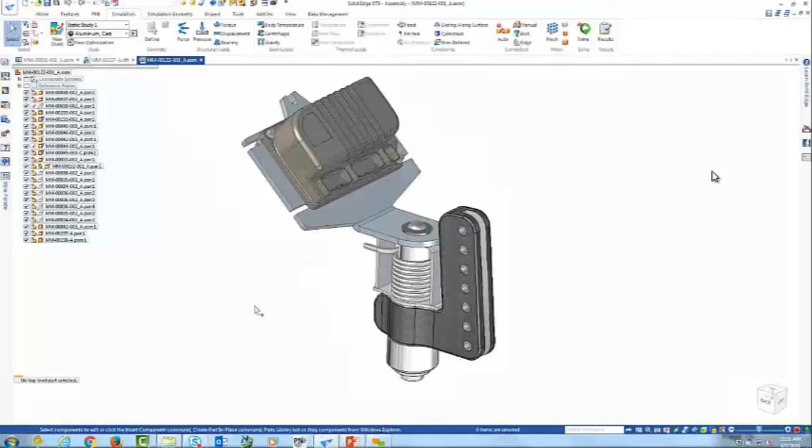Now, we made some changes to our clamping arm here. If we were to go back to our drawing, I just wanted to show you how Solid Edge is constantly keeping track. So if I need to update my drawing views, what's nice about this is Solid Edge gives us instantaneous feedback. It tells me whenever I go back to the drawing and update it that some values have changed here.

The value used to be 37, now it's 42. This radius used to be 2, and now it's 5. So what's nice about this is I can copy that content here, and then if I needed to document any of the revision changes that have happened, if this were a revision, I can come in and document that here.

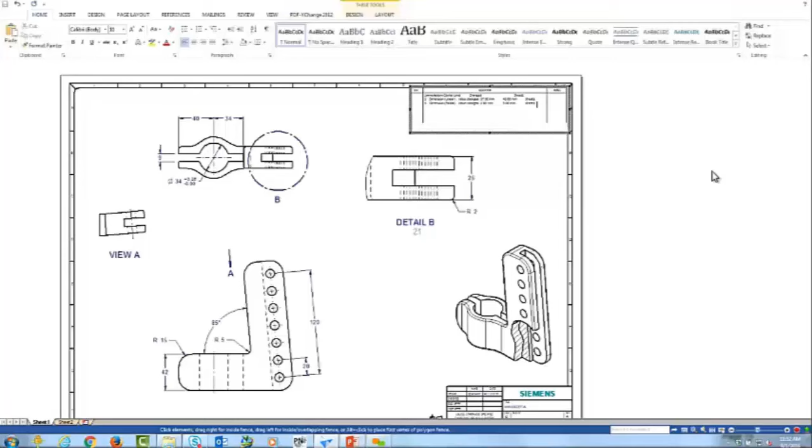We'll paste that information, and now I've got references to the changes that have happened or maybe revisions, and I can go in there and modify that text however I want it to look, but giving that feedback is really nice within Solid Edge.

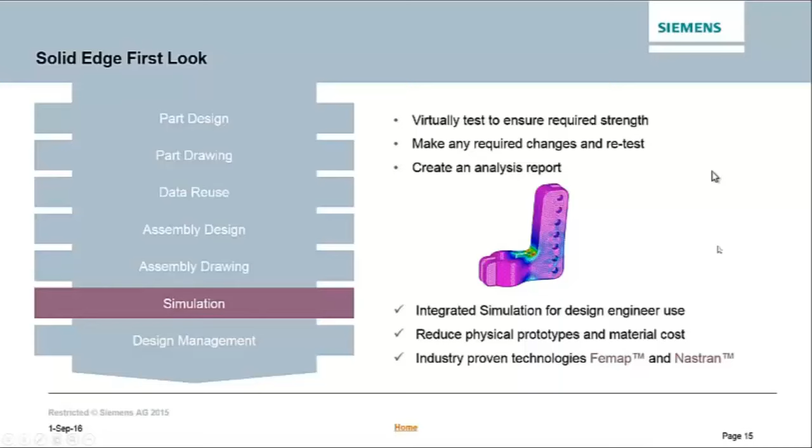So we saw how we could test our components very easily utilizing Solid Edge simulation. That's going to reduce physical prototypes, material costs, and things of that nature. And then finally, to wrap up, I want to show you a little bit of the design management tools that are built into Solid Edge, show you how you can navigate the data simply, quickly find the files that you need, and also collaborate with team members or customers.

Actually, I'm going to go into Windows Explorer. Many customers today are managing their documents just with basic Windows functionality. You can see here we're also utilizing Windows Explorer, but with Solid Edge, with the built-in data management application, we can very quickly find files because we utilize an indexing approach.

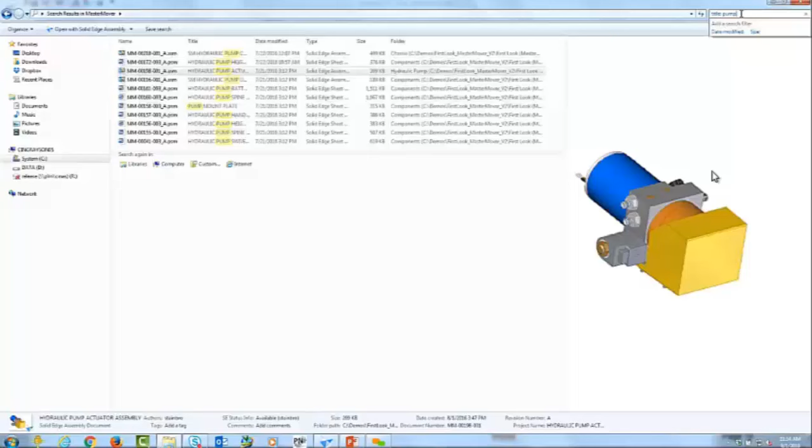For example, if I want to find any file that has the title pump, you'll notice very quickly, within a matter of just a second or so, it finds anything that has pump in the title. If I click on that file, it will show me a nice preview of it. If I come in here and type in the name master, we want to find the top level assembly, we can find that as well very easily.

Now, I'm going to send this document here that we've been working with to our design manager. I'll show you some additional information you can get out of the design manager and how you can see which components are there and get other information.

So within our design manager, again, we pulled up the master mover. It gives us information here, what manufacturing information is. This is an assembled component. Gives us information such as the title, the document number, what revision it is. It also tells us the status of the component. So you can see many of these files are available to work on. Some of them are actually in work right now by somebody else. And then you can change these statuses based on where that is within the process.

There are some other documents here. Remember the clamping mechanism we looked at. If I want to see a preview of that, here I get a nice preview of the document. I can get information relative to that as well. Maybe I want to open up one of these within their own window. I can do that also.

But the nice thing about this is our design manager allows us to collaborate with others within our organization, or if we needed to send this off-site to somebody else, I can take all of this information very easily and move it. Solid Edge recently became cloud-enabled, so we can also utilize cloud services such as Dropbox or OneDrive to very quickly take documents and share them with others utilizing those services.

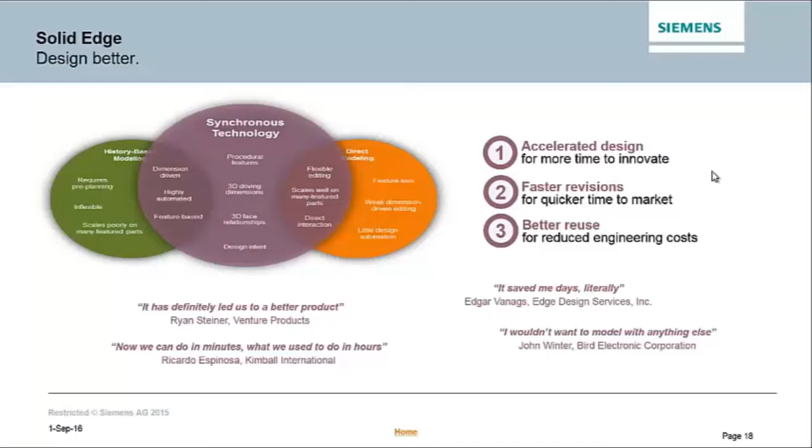One of the questions I have here is, we don't do enough design to justify purchasing Solid Edge. So, Kevin, if you want to go ahead and maybe answer that one.

I guess I need to know a little bit more information. I think there are many examples of Solid Edge customers that are able to cut the time to design the product, not just ease of use, but trying to understand the justification. I don't know if you can expand on that or not, but we'd be happy to show you how easy Solid Edge is to use with the different tools that you use on a day-to-day basis and what your workflows are. Maybe you can send Rich an email or set up a phone call, and maybe we can dig a little bit deeper into helping you make that justification.

Yeah, we would certainly welcome having an offline conversation to take that discussion further.

Okay, another question I had is, Solid Edge appears to be a little bit more than what this particular customer needs, and they really don't see a need for 3D at this point. So maybe expand on that a little bit, Kevin, and what your thoughts are on the advantages of 3D overall.